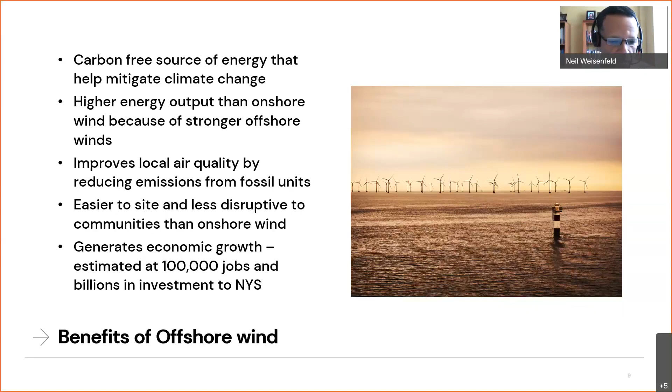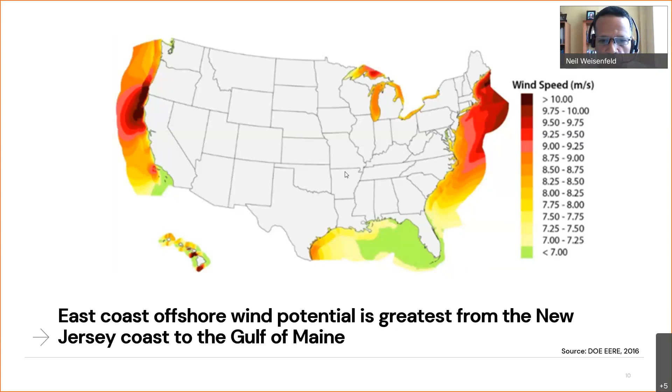I'll just turn it over to Garrett to take us through the next couple of slides. Thanks, Neil, and hello everyone, and happy Wednesday.

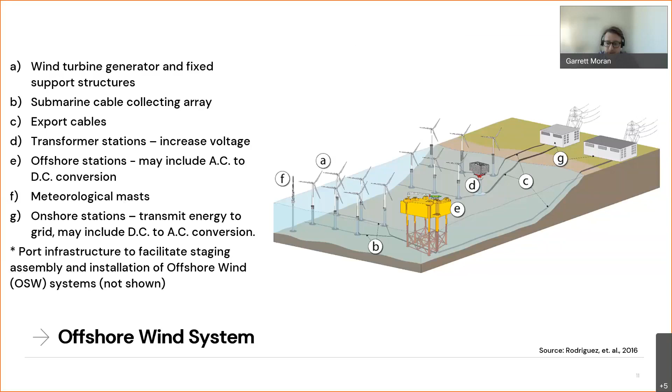So let's define the offshore wind system. It consists of the offshore wind turbines themselves, any subsea cabling and electrical cables, onshore and offshore stations, transformer stations, met masts, and then onshore stations, as well as the port infrastructure itself required to construct the offshore wind facility.

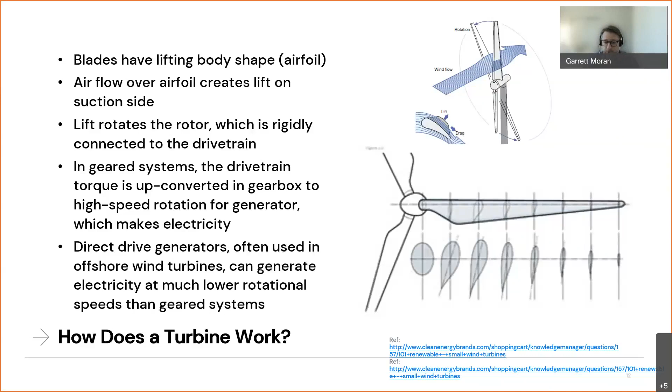This has been covered a few times in previous webinars, so I'll briefly touch on how a wind turbine works. Essentially, air flows over the blades, which have a lifting body shape, also known as an airfoil. This air movement creates a suction side on the top of the blade, which is turned into rotational movement of the rotor itself. This rotation in geared systems is up-converted to a higher speed rotation into a generator to create electricity. But most turbines offshore use direct drive generators, which are capable of generating electricity at much lower rotational speeds.

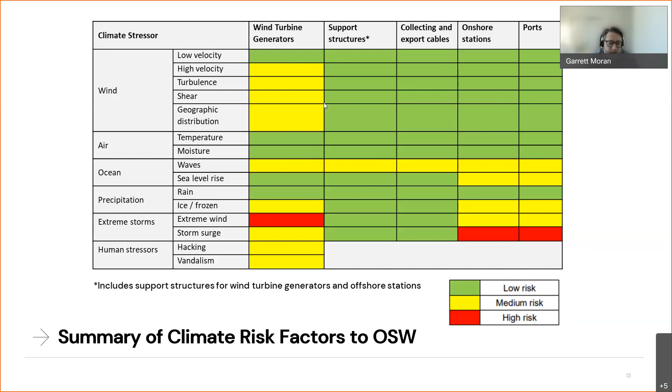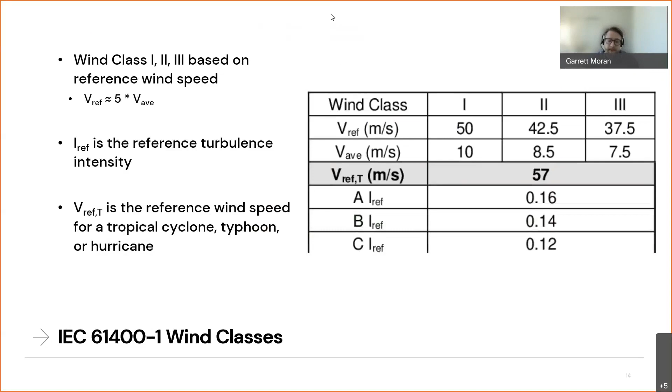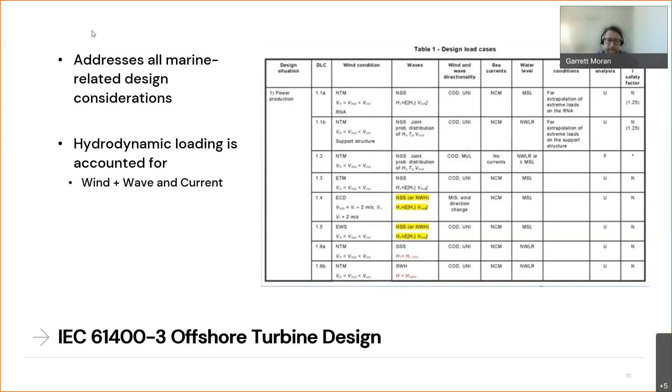The international design standards for offshore turbines do account for wind loading combined with wave and current. This is in the IEC 61400-3, and what I have here on screen is the main power production DLCs, 1.x for offshore wind, that combine wind with wave - you see that in the third and fourth columns there. Back to you, Neil.

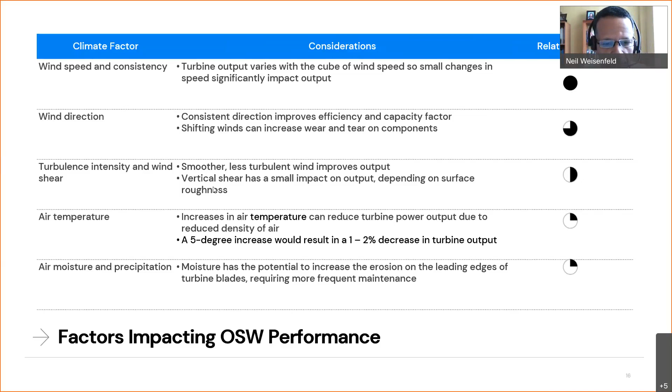For reliability, we mean the extent to which the system supplies output and avoids periods of temporary disruption as a result of climatic conditions, or anything else that would occur outside of its normal operating range. So where performance is more about achieving the objectives over the life of the offshore wind system, reliability is about the consistency of performance and the likelihood of conditions requiring you to shut down production temporarily.

Not surprisingly, extreme storms have the greatest impact. And although these are accounted for in design, they can and have damaged wind turbines, as well as the undersea and land-based infrastructure such as substations and ports.

Winds above operating limit, even without storms, may require the turbine to shut down to avoid damage and can disrupt output. Ocean waves can impact the turbine support structures as well as the undersea components like cables and moorings. And frozen precipitation can impact turbine blades and cause potential damage.

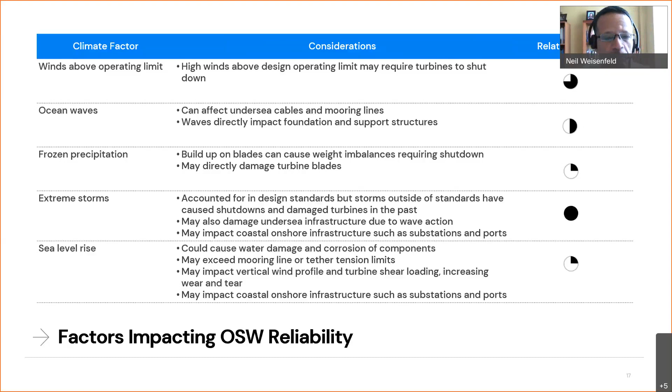So what does climate science project for these climate factors in this area by mid-century? The answer is it kind of depends on what you're talking about. The projections for wind in the Northeast are uncertain. Global speeds declined in the mid-70s, but they began to increase again beginning in 2010. So it really is uncertain as to where they'll go, and the current thinking is that there may be decadal variations in speed. What that says is climate science is an evolving area, and monitoring the latest science is important.

Temperatures are projected to increase. We talked about the 1 to 2% impact of a 5-degree increase in temperature, so a little bit of reduction in turbine output. However, there is an interaction between temperature and sea breezes that may act as a counterbalance to those reductions by invigorating the sea breeze.

Hurricanes are interesting. So as the planet warms and water warms, warmer water has more energy, and so that will support higher or greater intensity of storms. So the number of storms in the North Atlantic is projected to remain the same or even slightly decrease, but the strength of those storms will be greater, and so you'll have a higher frequency of stronger storms that will potentially make landfall. The other factor going on here is that the projections show that storm tracks may move somewhat further offshore, and that may allow storms to have a greater likelihood of impacting offshore wind.

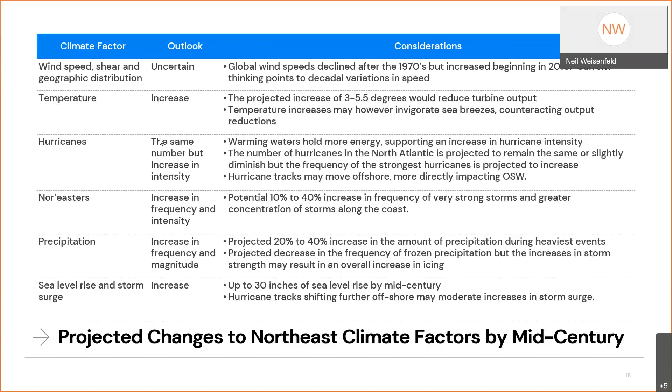So offshore wind has the potential to impact communities and wildlife, and that is considered in planning and design for offshore wind. Overall, wind power has a significantly lower impact on avian species compared to fossil power. And here, the number here is 3%, and the attribution for these numbers are in the report, which you'll find on NYSERDA's website. So there are about 130 references there, and they're all there.

The question here we were dealing with was, what's the potential that climate change will change the dynamics between wildlife, communities, and offshore wind? Will climate change drive wildlife to interact with offshore wind to a greater degree, and therefore change the dynamics and the potential impact? And really the answer was no indication based on the literature review, kind of the latest thinking in science, that avian species will move further offshore because of climate change, or that increasing temperatures of the oceans will change the dynamics of sound propagation so that underwater species will be more impacted. So no clear indication there.

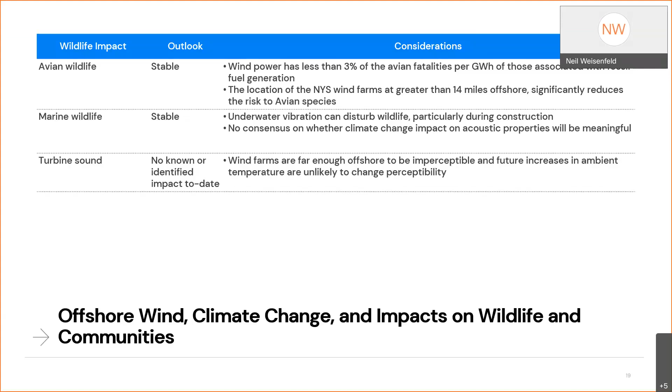So I think, Garrett, you're going to take over and tell us, what do you do to the turbines and structures in the face of all of this? Thanks. So what are some things that we can do, or designers or operators or OEMs can do for turbine resiliency to changing wind speed, direction, and shear? So as Neil mentioned earlier in the presentation, wind speeds have a direct impact on turbine performance, and there are some passive and active technologies that can be incorporated both in the field as well as part of the initial design and at manufacturing to help mitigate the impact of increasing or changing wind speeds.

Vortex generators, gurney flaps, stall strips, and aeroelastically tailored blades are all passive technologies. Some can be done in the field, some must be done at design and manufacture. Microtabs, flaps, active flaps, and Lidar are active technologies. And in the following slides, we'll get into more details on some of these items themselves.

For changing wind speeds, you could also have just more robust designs, right? Increased international design standards in prediction of periodicity of extreme weather as well as severity of the extreme weather. That VREF-T that I mentioned earlier, increasing that value. Typically, the international design standards look at the historic trends of weather and then project that into the future. That is no longer really valid when we take into account the impact of climate change going forward.

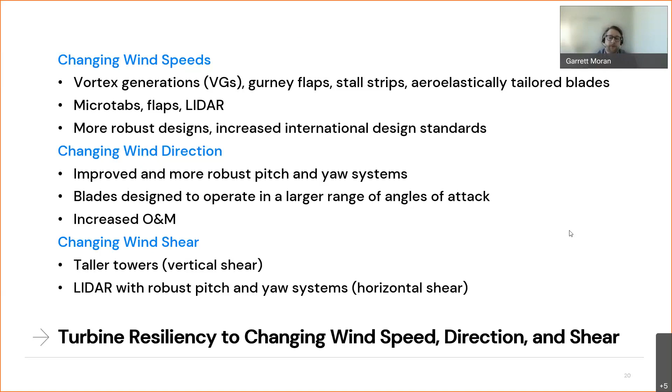For changing wind shear, you can look at taller towers to get up into the vertical shear, or Lidar with more robust pitch and yaw systems to respond to changes in horizontal shear.

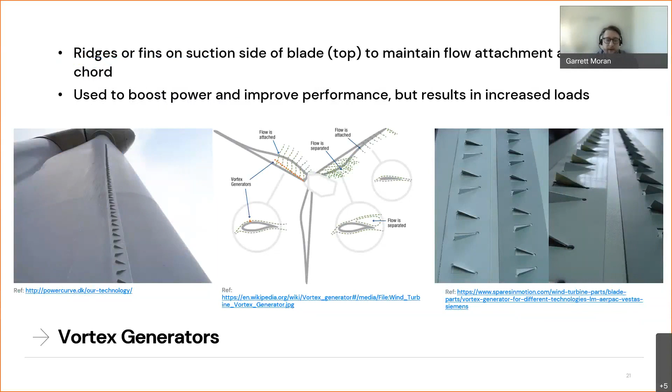Next slide, please. So looking at VGs, they're essentially fins on the suction side of the blade that maintain the flow attachment along the blade chord direction. They are often used and added in the field or at the time of install to boost the power and the performance of the turbine, but they do result in increased loads. Typically for offshore wind, I would expect these to be on the blade before the blades are installed on site over the water, but they can be a retrofit if needed. Next slide.

Gurney flaps. So they are added to the trailing edge of the blade. Again, these are passive technologies. They increase the pressure on the suction side of the blade, improving performance and maintaining the boundary layer to the trailing edge. They do act as chord extenders, and they can also delay stall, but in doing that, they also increase loads and performance. Again, these would likely come on the blades before they're installed over the water. Next.

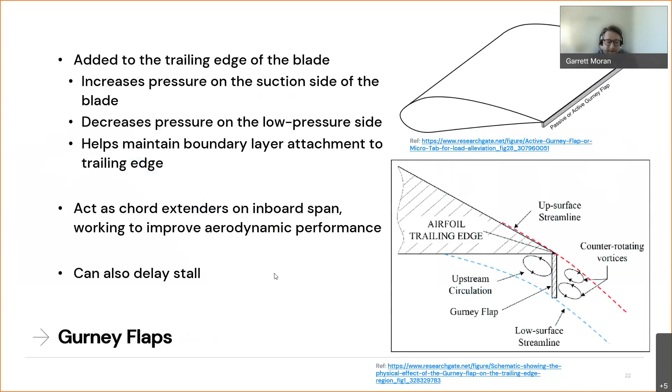All right, aeroelastic tailoring. So this is a passive technology that needs to be done at time of design and manufacture. This essentially couples the bending of the blade in either the flap or the edgewise direction with a torsional degree of freedom. So as the blade bends, it pitches out of the wind and passively reduces loads. There are two main methodologies to implement this into the turbine performance. One is through the physical sweep curvature.

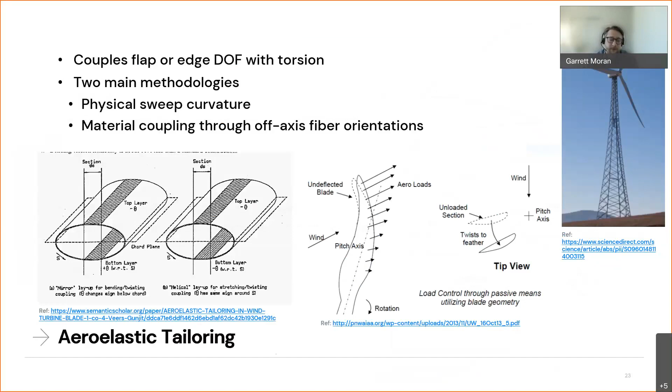The other method to implement bend-twist coupling is through material coupling of off-axis fiber directions in the blade shell or structural members itself. This is quite challenging because your manufacturing quality has to be top notch and consistent to be able to achieve the response that you want as the blade flies. Next slide, please.

So some active technologies. You can use microtabs, synthetic jets, and stall strips. All of these act to control the flow in a dynamic and active way. Typically, synthetic jets and microtabs are kind of like dynamic VGs on blades. The challenge we have with any kind of active technology to address changes in wind or load control is that it has moving parts or some kind of electrical system that typically need maintenance. The more pieces that move, the more likely it's going to break. And maintenance and access offshore is significantly more expensive than onshore and more difficult.

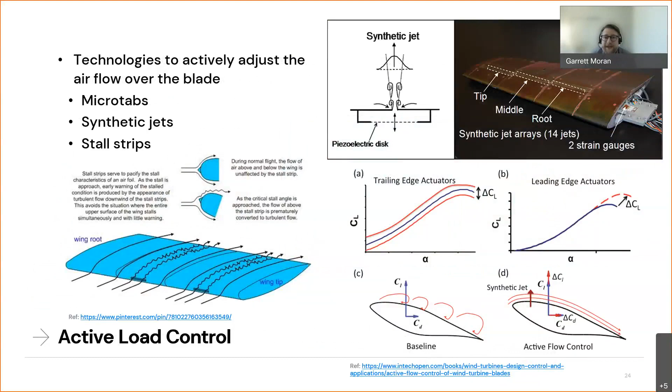So this type of technology, while available, is oftentimes very much in the research phase or in the pre-planning, but is not flying in most modern day utility scale turbines. Sorry, if you go back for just a minute, Neil. Microtabs and synthetic jets, like I said, act like VGs to control the flow. Stall strips preemptively separate the flow before reaching extreme load conditions. Again, all of these can change the way the blade performs dynamically. Next slide, please.

Lidar. So Lidar is a really cool technology, used quite a bit onshore presently. Essentially, Lidar looks upwind, and I use air quotes for that, so that the turbine can see what is coming down the stream tube and can proactively make corrective actions and dynamically respond to the incoming wind. So for instance, if Lidar sees a gust coming into the rotor, it can pitch out to catch that gust and not necessarily experience an overspeed.

There are two types of Lidar typically used in industry. One is nacelle mounted, upstream or forward looking, and then there is ground mounted, looking up. For offshore turbines, I would expect nacelle-mounted Lidar to be much more useful. I think putting a ground-mounted or surface-mounted one looking up on a moving surface like the ocean or water surface would be difficult.

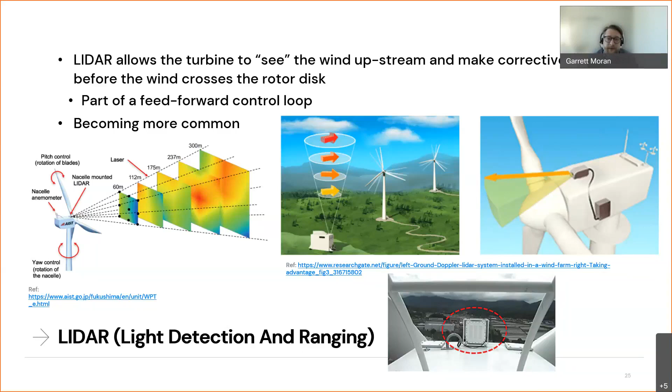Next slide, please. So active flaps, very much like an airplane wing. You can install active and dynamic flaps onto the trailing edge of a wind turbine to adjust and control the turbine, either reducing loads, increasing performance, individual pitch control, collective pitch control, and things like that.

The challenge we have, again, with this very complex machinery is that there's a lot of moving parts. There's quite a bit of maintenance necessary, and typically flaps would be installed in the outer sections of the blade that are not accessible internally in the blade. And for those reasons, I would not expect active flaps to be used very often in offshore environments.

I could see some type of movable flap that is sympathetic or responsive to external loads, but again, that would be more of an academic research project than current technology at the moment. Next slide, please.

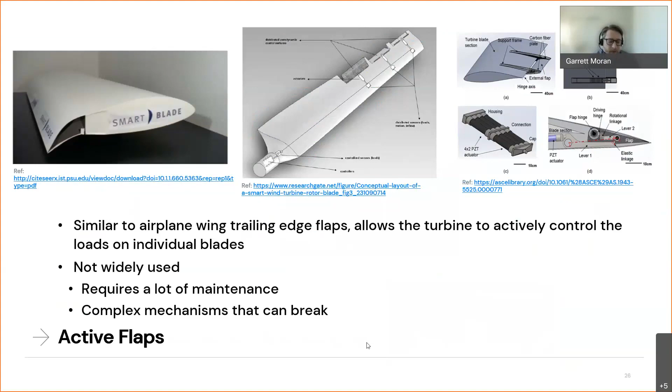So turbine resiliency to sea level rise and wave loading. So we've looked at wind and changes in wind direction and speed and wind shear. What about the other main loading into offshore systems, which is wave and current? So wave loading is going to affect the foundation, whether floating or fixed structure, as well as the tower bottom of the offshore wind systems.

You can have more robust foundation designs to withstand the increased wave loading. That includes heavier and more massive foundations, more massive or increased number of foundation bolts connecting the tower bottom to the foundation, as well as looking at the way that the cables and tethers come off of the water surface of the wind turbine and touch the sea floor. Make sure that there's significant length such that that touchdown point on the sea floor is not negatively impacted by the increased wave loading or increased motion due to the wave loading.

Sea level rise itself is likely to have a minimal impact to offshore wind. Typically, the sea level is already accounted for in offshore designs before installation. However, if at some point in the future it does become more significant or critical, the designers and installers can always put the turbines at a higher elevation relative to the seafloor, maybe to account for variability in that sea level change itself. Next slide, please.

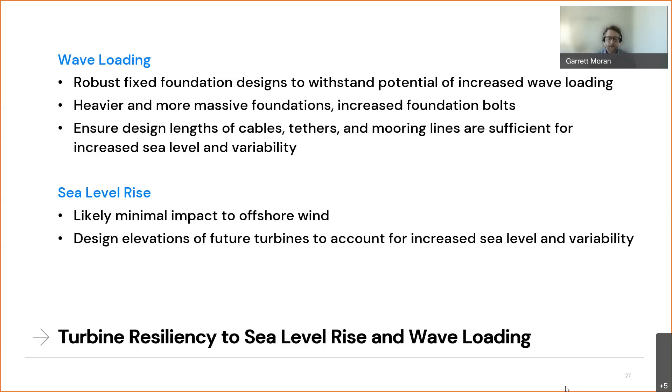So, extreme weather. I think, as I mentioned at the top, this is a significant impactor to offshore wind systems and wind turbines. One thing you can do is, as I mentioned before, account for the increased severity and frequency of extreme weather in those international design standards, not looking just at the past, at what has happened and projecting that forward, but actually accounting for changes in those future expectations.

Heavier and stiffer blades to withstand increased loading, significantly due to extreme weather, increased severity of extreme weather. Of course, the turbines themselves will not be operating in something like a hurricane, but they're still going to be experiencing the extreme loading from that weather event.

Stronger and more robust pitch and yaw systems. So the turbine, while idle during an extreme weather event like a hurricane, would still need to be able to track the predominant wind direction so that loading would be maintained within the intended design idle envelope. So to be able to withstand higher loads and yaw the system, you need to have a more powerful and robust system. There are some more radical designs that have come about within industry in recent years.

One is split pitch systems. You can see in the picture on the left, the pitch system is at about 1/3 of the blade span. That allows the pitch system to be smaller because it does not need to rotate the entire blade and still be operational in higher loads.

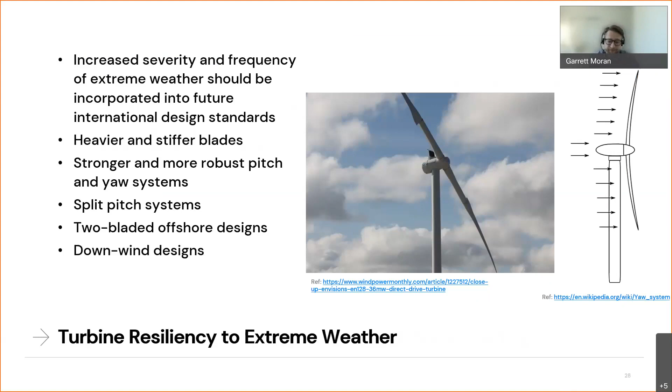Turbine resiliency to precipitation. Offshore tends to be wet, and oftentimes very cold and icy. We can have hydrophobic blade coatings and paint to keep the blades clean and clear of ice if that's to develop. Other de-icing and anti-icing weatherization technologies in the nacelle, the hub, and the rotor itself, whether it's forced air, heating through electrical lines, or through pneumatics, give you ways of maintaining that temperature above freezing.

And then, of course, real-time health monitoring and remote sensing to detect when there is an issue, if the turbine starts to have a vibration because the rotor's imbalanced due to ice or what have you, and to take proactive measures at that time.

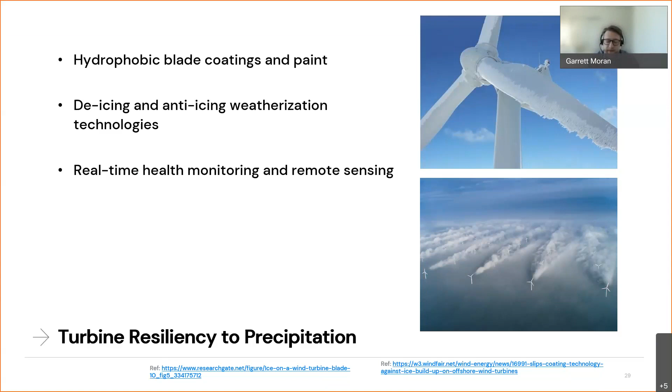So just want to cover building the resilience of coastal infrastructure. I think we keyed up the point that there is significant coastal infrastructure that is part of the offshore wind system, not just the substations that take the power and integrate it into the grid, but coastal ports that are used for staging and for construction and maintenance operations.

So for sea level rise, adaptations include either directly resisting it with things like seawalls, waterproofing, or nature-based solutions like wetlands and oyster reefs, or avoiding it by elevating infrastructure and allowing the area below to be flooded, or retreating by potentially relocating a substation. You can't really relocate a port back from the ocean because you need water access, but you certainly can relocate substations.

For precipitation, increasingly heavy downpours can be managed by more robust drainage systems, porous paved surface technologies that can absorb water, and green infrastructure that can also be helpful.

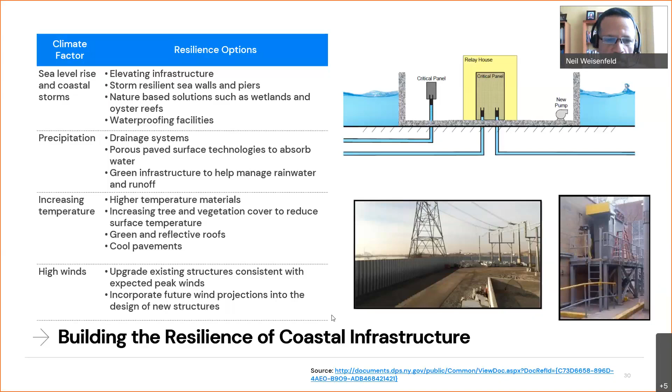But given that, designers and operators have a pretty broad range of options to build resilience of these systems. Some of these options, as both Garrett and I have covered, are available today and being used today, while other options are going to require continued development, and there's certainly a lot of thinking being done in this area.

As far as the climate science, some of it is more certain than others, and the uncertainty really requires monitoring that emerging climate science as well as technologies, to allow designers to incorporate appropriate resilience options into future offshore wind systems.